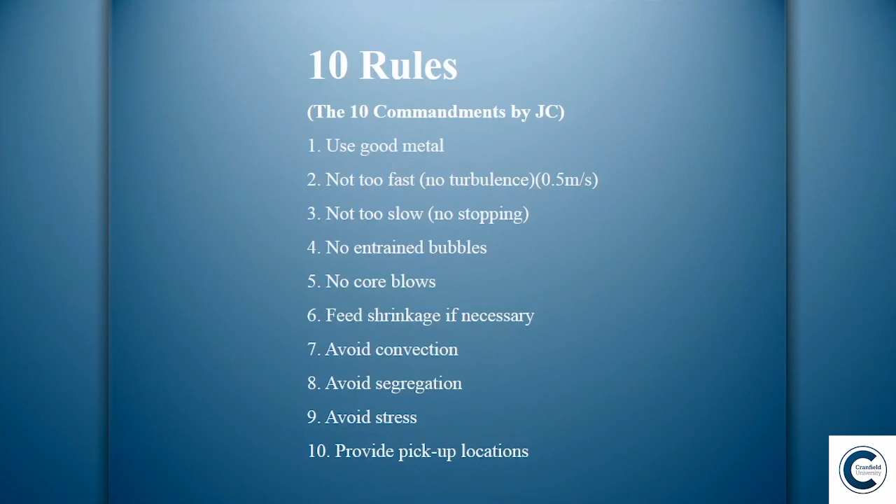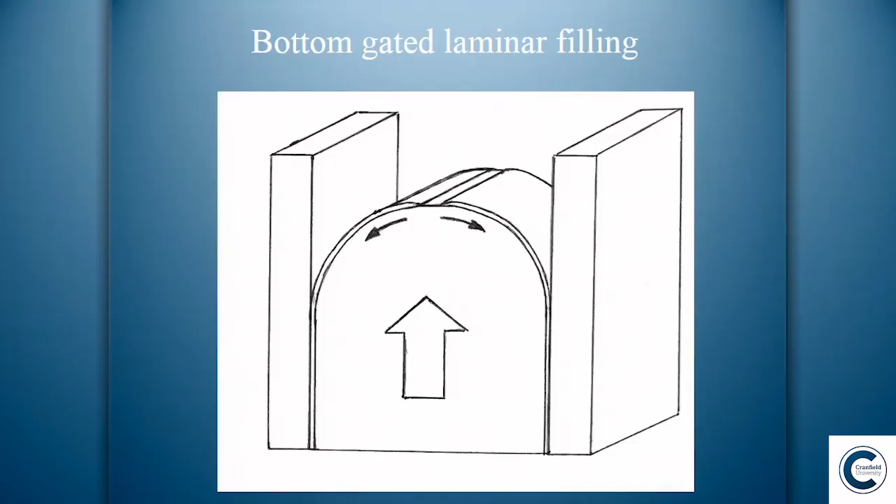Unfortunately, the junction of the two is normally a solid, and this gives us problems. The top is a dry surface, like sandpaper under the microscope, but underneath it's 100% wetted - we're in atomic contact under there. The trouble is, every time we fold in the surface, it always goes dry side to dry side. You can't get it any other way. This is a law of nature: the dry sides come together, which means there's no bonding, which means it's a crack floating about inside the liquid.

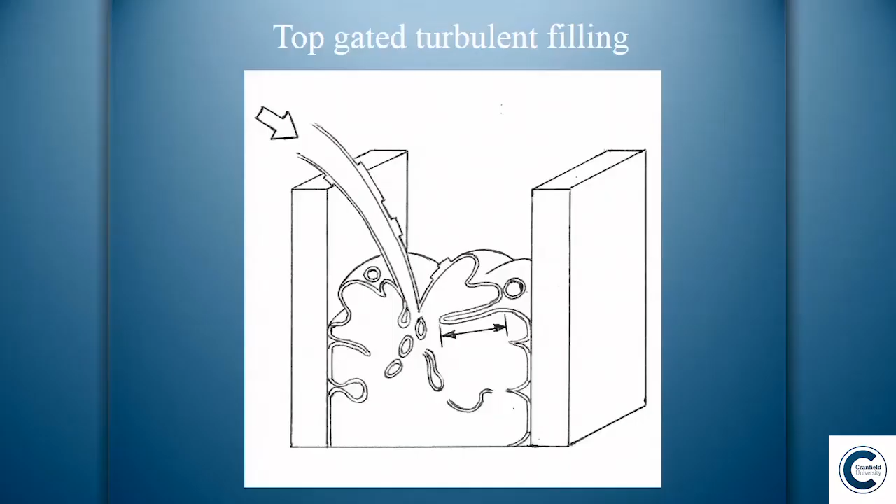Now, by turbulently pouring our castings, we're cramming them with cracks, and then we wonder what's happened to the properties. These things are so pathetically obvious it gets me furious - I worry they're too simple for people to understand. And this is a problem: there's an enormous simplicity in this subject.

So I now talk about the whole concept of entrainment as being the key aspect of getting quality into castings. I use this name, entrainment, all the time now, and these particular entrainment defects are what I call bifilms - double films, which always act as cracks. So every time you see oxide in your metal, you know it's there as a double film, it can't be there as a single film. It has to be doubled, so every oxide is a crack. These things are too simple to understand easily, but bear with me.

And the other thing - we see lots of porosity in castings, and people whinge on about the hydrogen content and other nonsense like this. But at the end of the day, most of the porosity we see, you have to learn this special technical name: it's called an air bubble.

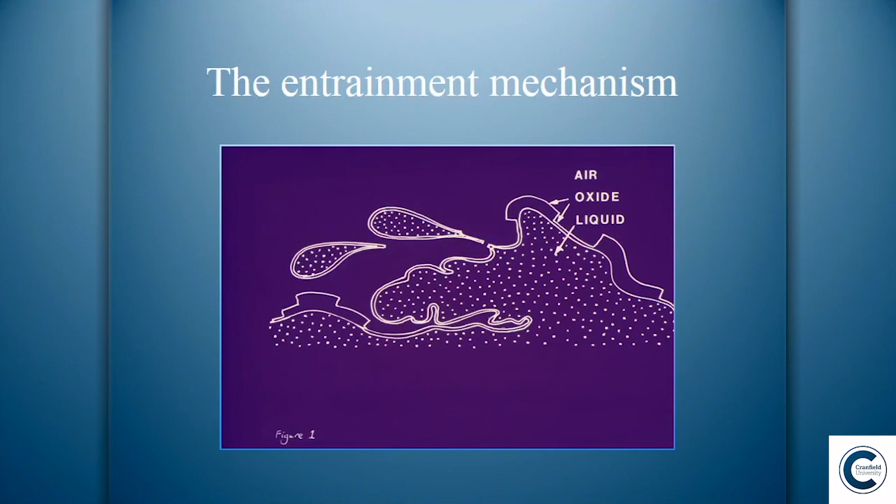Okay, so these are the critical things. Bifilms and bubbles, they are the entrainment problems. So this is the kind of thing we see, and the whole business of filling castings is so messy and turbulent. It's amazing we ever get any decent castings.

Of course, you have this special scientific experiment. I have a bifilm here. It's a parallel bit of film, two films, with no bonding between the two films. And if we increase the pressure on the inside, it does this amazing thing, which has happened here.

And this happens in our castings totally naturally as a result of shrinkage. The bifilm opens again, and as it continues to fold open and get bigger and bigger, so the properties come down and down, which is why heavy section castings have poor properties. Light sections have better properties because the bifilms don't have time to open before it goes solid.

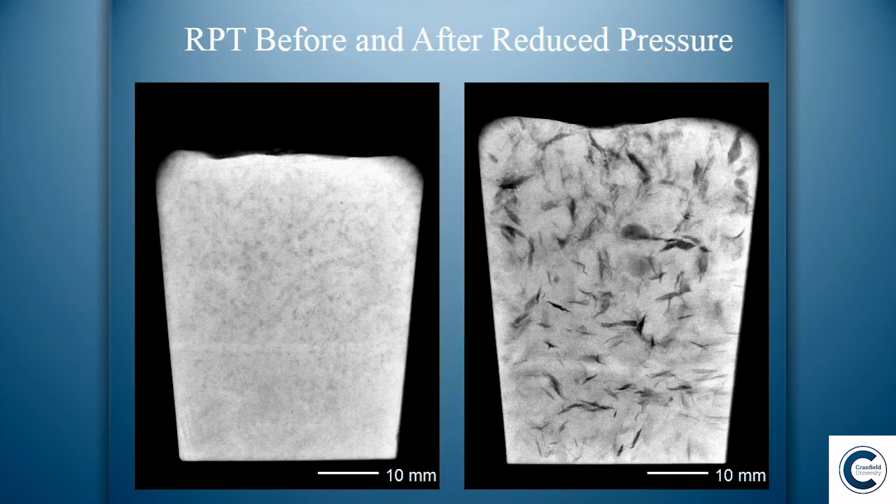When you think that all our metals are cast full of bifilms, if all our metals are showing properties which are a fraction of what they could be. And I think we could revolutionize engineering if we got rid of this sort of thing and redesigned our foundries.

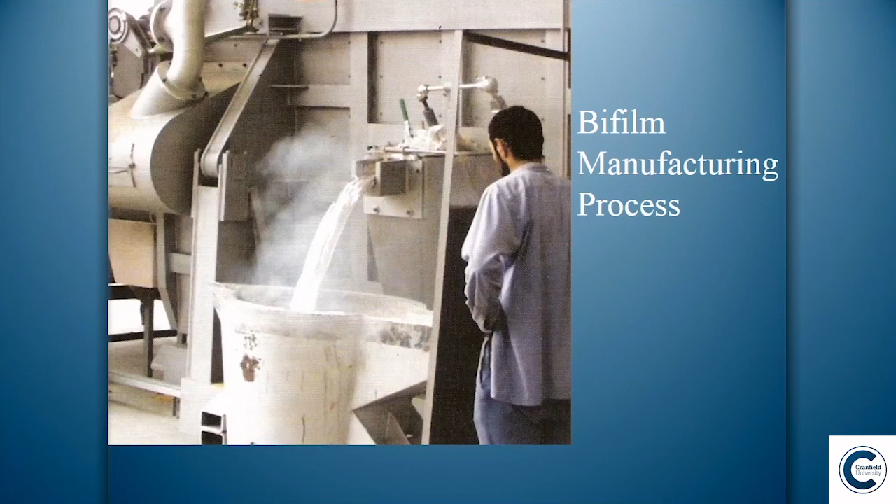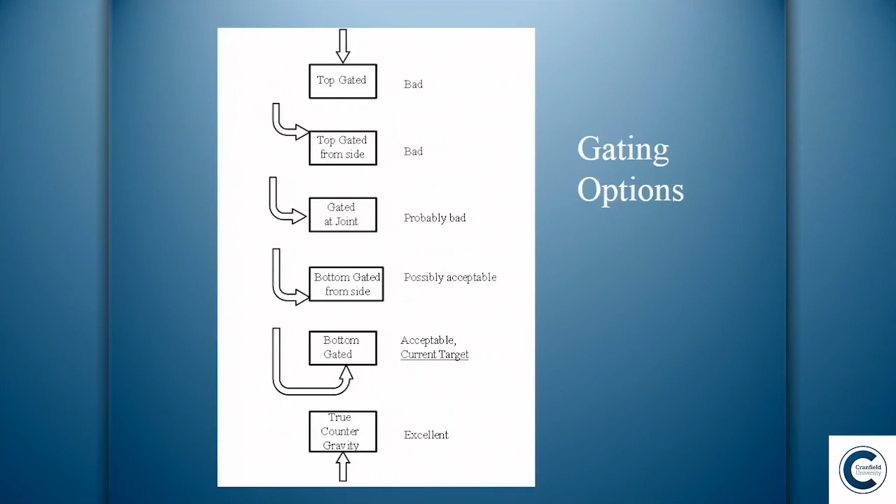But if we bring it from the bottom without ever pouring once, and only come up against gravity, this is in a league of its own. So I would like to see the whole of the industry never pouring any metal ever again. And our foundries should be designed never to pour metal. Pouring metal is extremely damaging to the metal. And I'd like to see them all moving to counter-gravity.

Now, I'd like to see all of you putting that into your next 5-year plan. In the meantime, we have to live for the next 5 years. So we'll retreat and look at this and to see what we can achieve using gravity, but using it carefully.

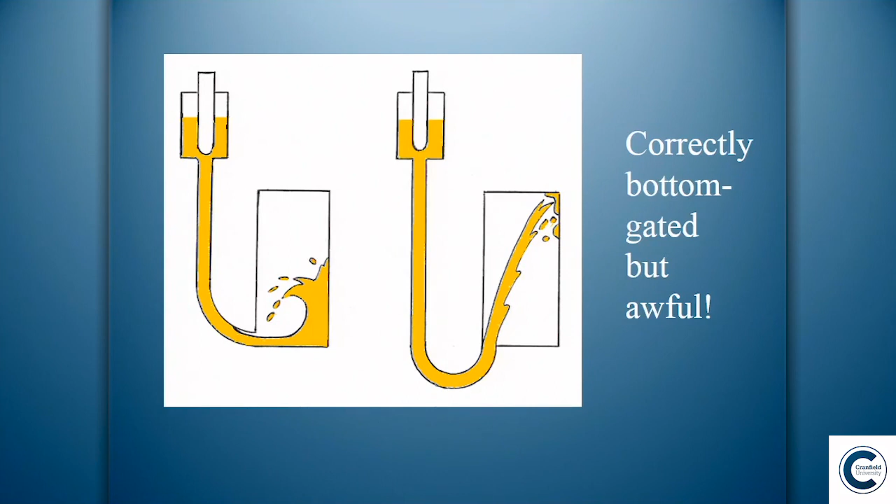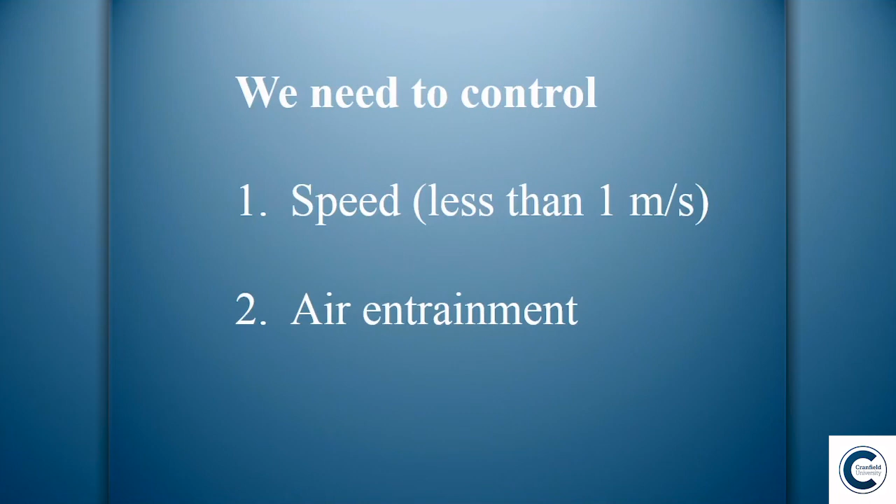So, here we're coming in at the bottom for castings, so we're correctly coming in at the bottom to try to fill up, but this is obviously too fast, so even when we come in vertically this way, we're coming in at the bottom, trying to fill uphill, but, frankly, failing miserably. So the speed needs to be controlled, and there's plenty of both theoretical and practical work which tells us that the speed has to be less than about a metre a second. And not only do we have to control the speed, we have to control air entrainment.

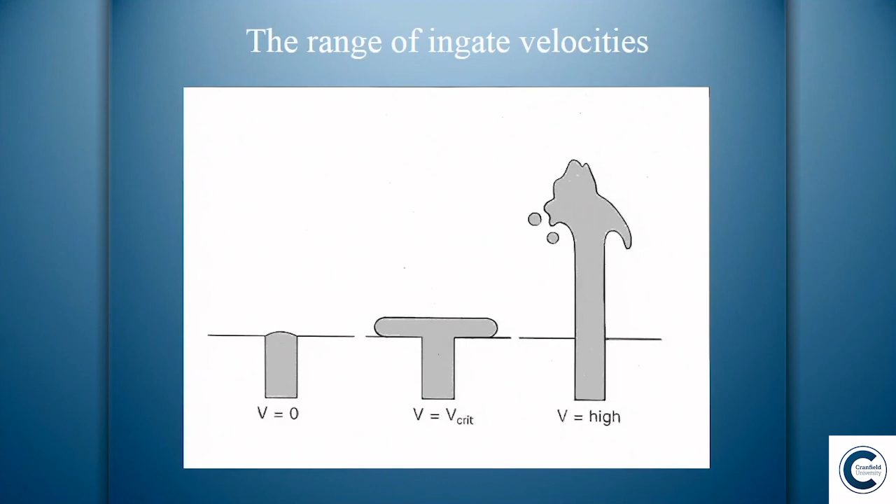So, the various ways, we have a look at the different velocities that we can come in. If we come in at 0 velocity, the metal is beautifully safe, but it's just a way of manufacturing empty molds, which is not good for production. If we come in too fast, the metal leaps into the air and falls back, and you're now manufacturing bifilms and bubbles. But there is this critical velocity where the metal's just supported by its surface tension. And this is about the ½ metre a second, which you can push to about a metre a second. And in that bracket of velocities, you can make actually castings without entrainment defects.

So, yes, this is the kind of speed we want. And it's this speed for practically all the liquid metals, whether it's titanium or aluminium or steels.

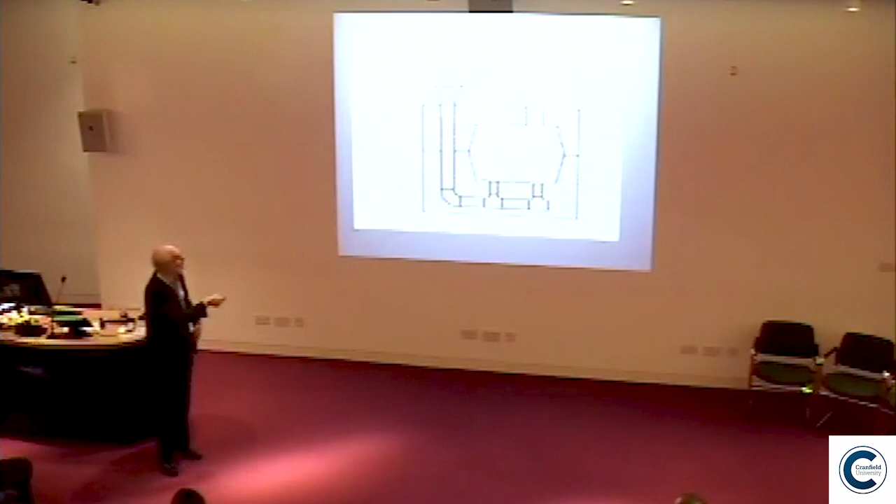So what happens now when we try to pour our metal? We're coming in at the bottom. We want to come in at the bottom, but what's happening here? This conical basin acts as a pump, and any chemical engineer would know that we're dragging air from the environment and forcing it down through the cone, and this mixture coming down here is a mixture of about 50-50 metal and air.

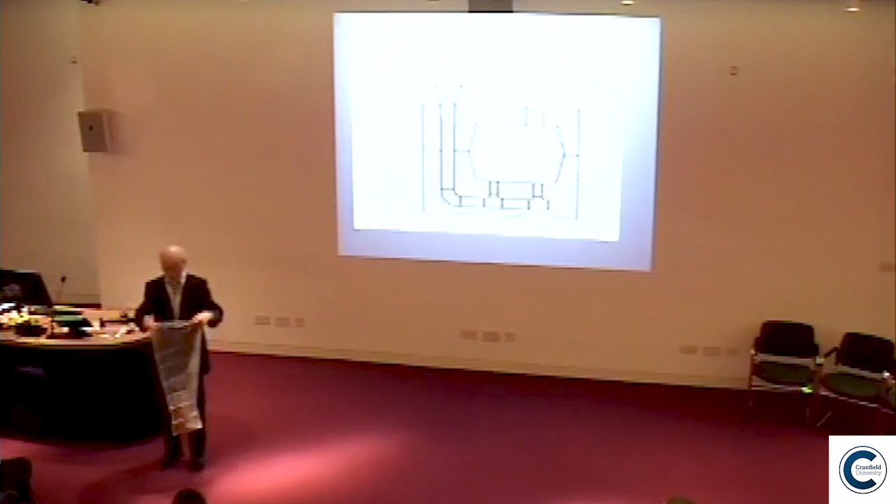Now, I'm going to have to—how much time have we got? I'm running out of time, but I have to show you this one. This is the simulated... many of you have seen this before, but I'm sorry. Let's move on, just one picture.

If we get rid of the conical basin and put our ladle directly on the mould, we eliminate the basin, and I call this contact pouring. And you see, because we don't get air in here, now this whole thing is pretty well free of air.

So I'm going to do a contact pour now for a simulated lung full of liquid steel, just to see what the volume is.

And it's at this point I always feel completely ashamed. I mean, you wouldn't think I would go to the gym every day, would you? Anyway, that's it, that's a simulated lung full.

And now I'm going to do a conical basin filling with the same simulated lung full.

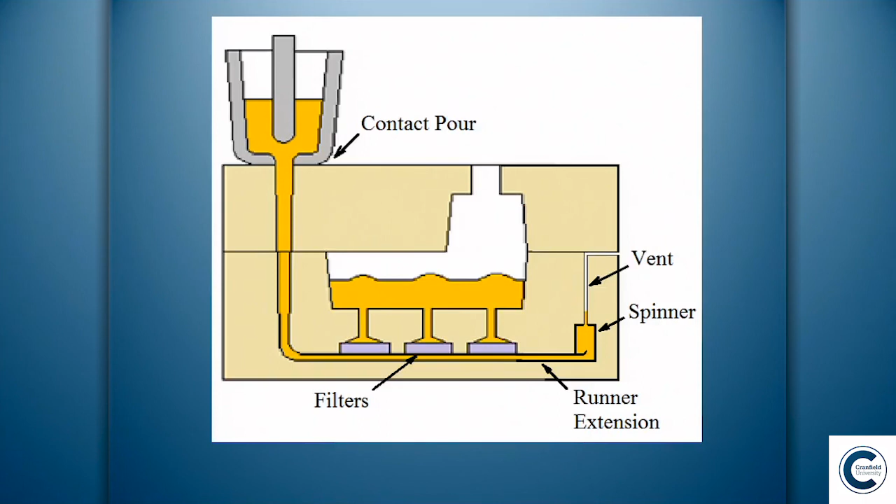So, and here, we'll come back to this particular layout, but let's move on quickly. There are ways to get round it, not using contact pour, and this is using an offset step basin where the bubbles can go up here, and then bubbles go one way, metal goes down this way.

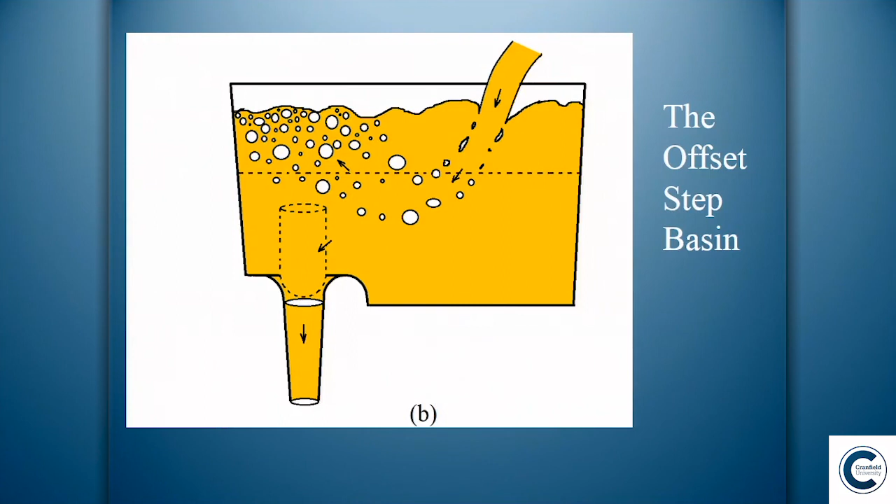Unfortunately, you're entraining the surface oxide, so we are entraining bifilms, and the bifilms don't have time to detrain, so the bifilms go down, only the bubbles go up. So this is only half the solution.

However, there is a way to use the basin very, very carefully, and my good friend in Canada, Bob, gets his ladle right up to the edge of his pouring basin so that he's not actually entraining anything. The oxide is now stationary and the metal is moving underneath.

And just by paying that care, he now gets properties of about 18% elongation, as opposed to scratching around with a few percent of elongation in aluminium alloys, which most of us do.

And I say to him, why are you only getting 18% elongation? Why aren't you getting 30% or 50% elongation, 100% even? And these high percentages, I'm sure, are attainable, and they're attainable in steels. Most steels have about 50%. And that's because they detrain their bifilms rather quickly, because the density difference is quite big, so the steel cleans itself quickly. That doesn't happen in aluminium, which is why aluminium has such poor elongations most of the time.

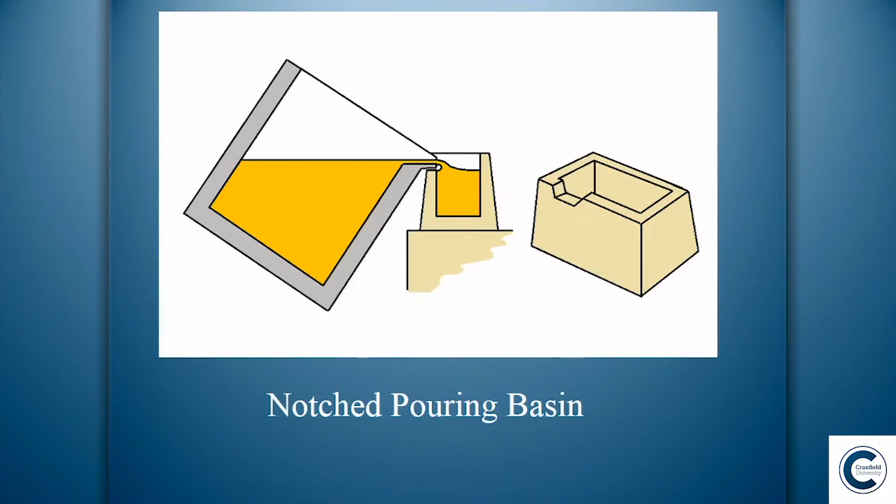Now, unfortunately, when we first pour, the whole system is full of air, and we want it full of metal, of course. And for those first second or two in the priming, the two are mixed. And so you have priming bubbles which are entrained in the system. And it's essential that we get rid of those.

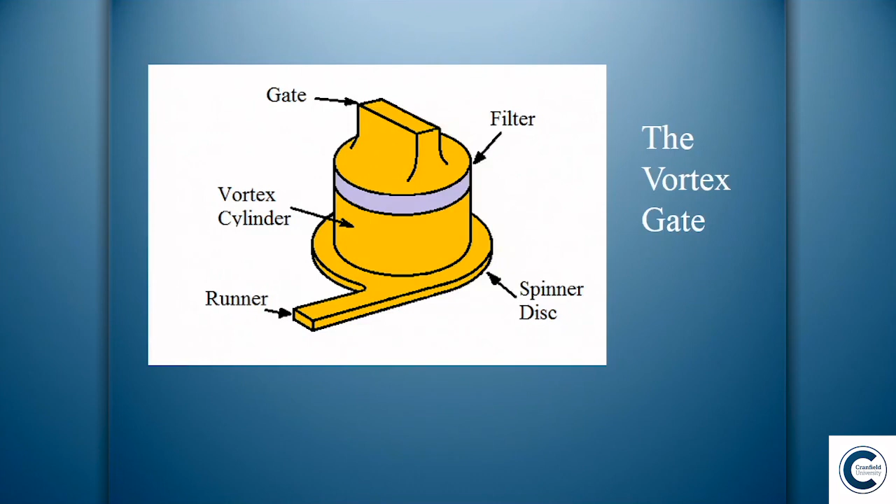But then more bubbles arrive, the bubble grows, more bubbles arrive, it grows and grows until finally it's buoyant enough to force its way through, and the bubble goes up through the casting, leaves a huge oxide bubble trail as it goes, and makes a great mess of the casting. So I can't recommend this, unfortunately.

People used to put dumps at the end of runners to take cold metal. What they really were doing were taking damaged metal, hopelessly entrained metal because of the priming problems. Now, unfortunately, most of those dumps at the end had a reflected back wave along the runner, and so you'd fill the dump and then it would unfill and put all the mess all the way back along the runner. It would then go up through the gates and into the casting.

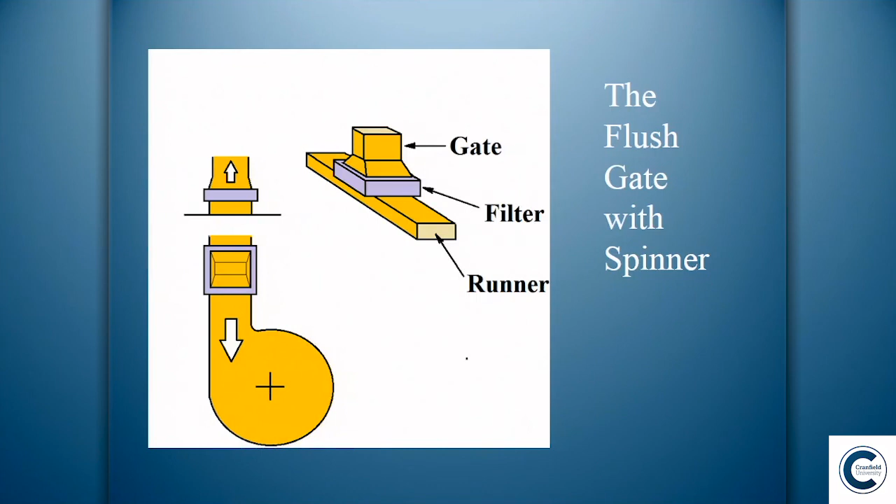I'm sorry if that sounds rather convoluted, but we'll come back to it in a moment. I just want to mention this because it's in the title to the talk. I don't know who put this title to this talk—it must have been you, John.

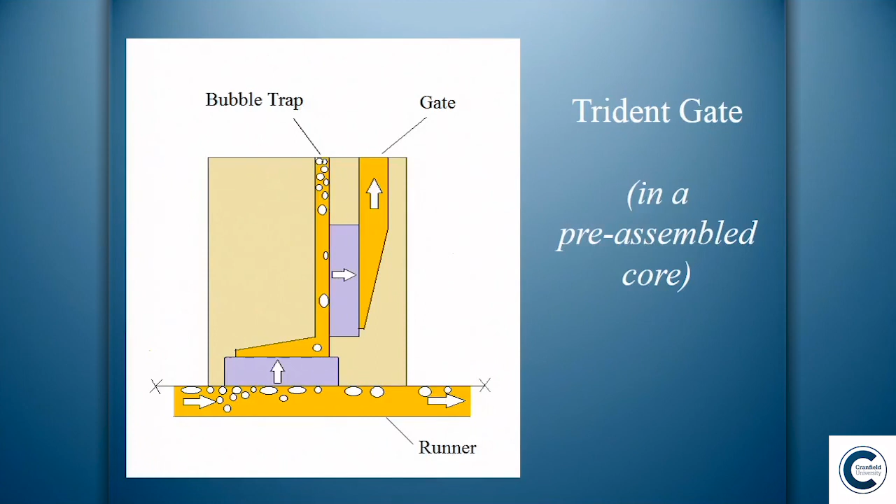This is the Trident Gate, and again, my friend Bob in Canada is using this for all his castings nowadays. There's a filter here which encourages the priming bubbles to go straight on and not come through into the casting. And if some do come through, they then roll up the surface of the second filter and sit in the bubble trap. The metal goes through, and then this is the gate into the casting.

And this whole thing here is a little block core, something about this size, just sits on the runner. He's been using this for over 2 years now, and what he tells me is that he hasn't made, during this period, a single casting with a single defect in it.

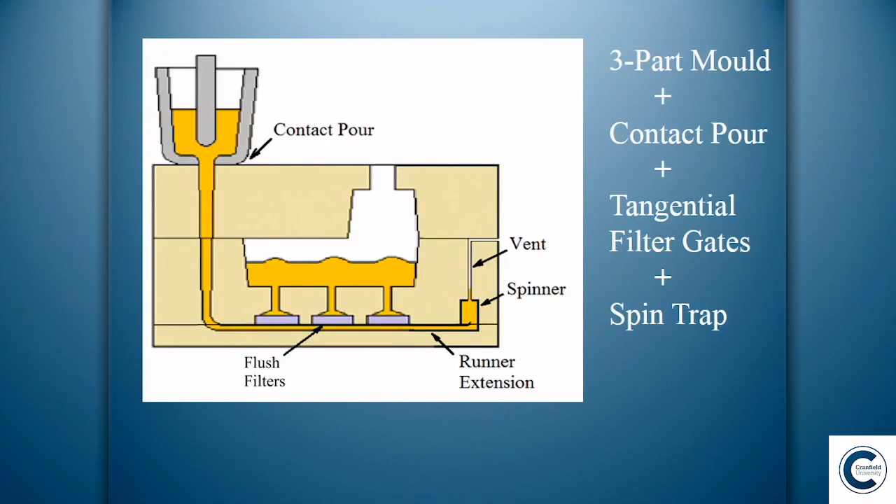Now, it's finally arrived. This is the first time in history I'm able to stand here and tell you about this, because only this last week I've heard two reports from opposite ends of the world, one from Poland, one from the States. People have been testing this system, and they find, to their amazement, that it works. So I'm delighted that independent people are coming back to me now to say, yes, we can make perfect castings for the first time in history.

So we're at a very important state. We're able to do this even with gravity. To be honest, we'd do it even better by counter-gravity. And the wonderful thing about counter-gravity is it's so easy to automate. I've been working with a foundry using counter-gravity just recently, and the speed at which we could produce castings was so exciting. And all of these castings are perfect. So I think we're at the threshold of something really big, really important, that could change the whole of engineering.